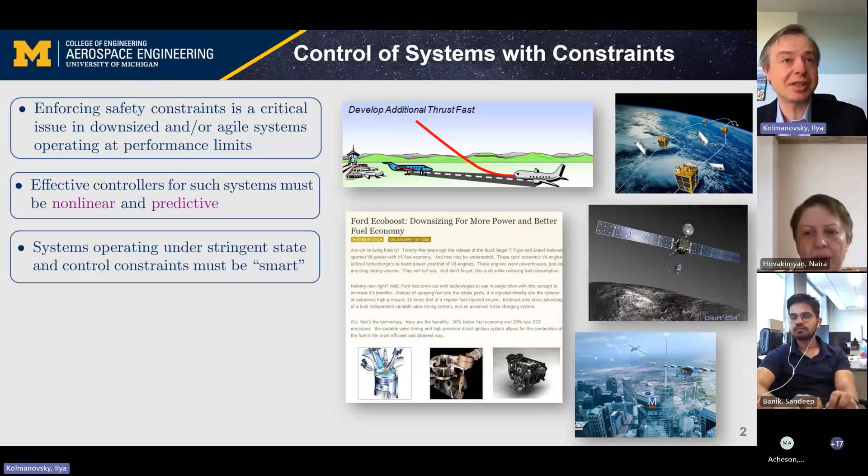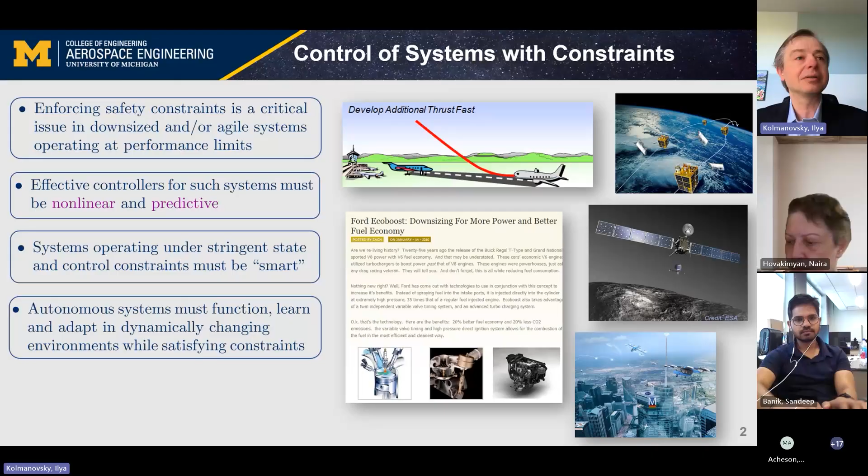The case when you have both state and control constraints, actuator limits, is perhaps the most difficult, because these are situations where systems operating under such constraints must be smart. And if you think about autonomous systems that operate in dynamically changing environments, they must be able to learn and adapt. I will not dwell on this.

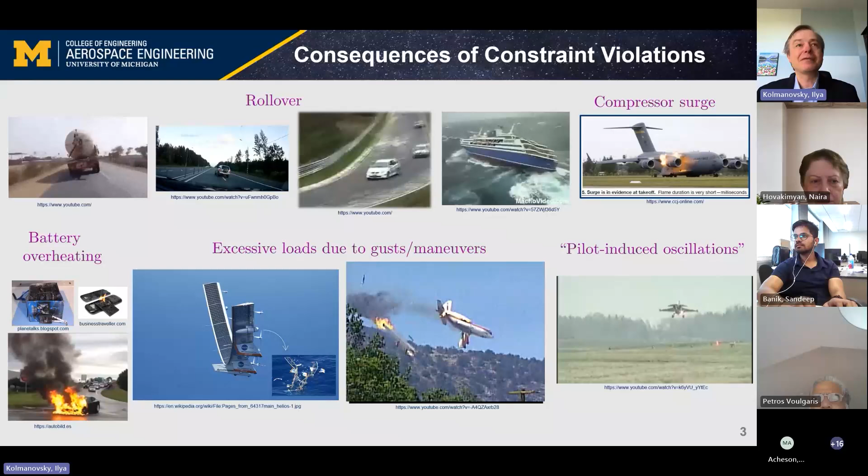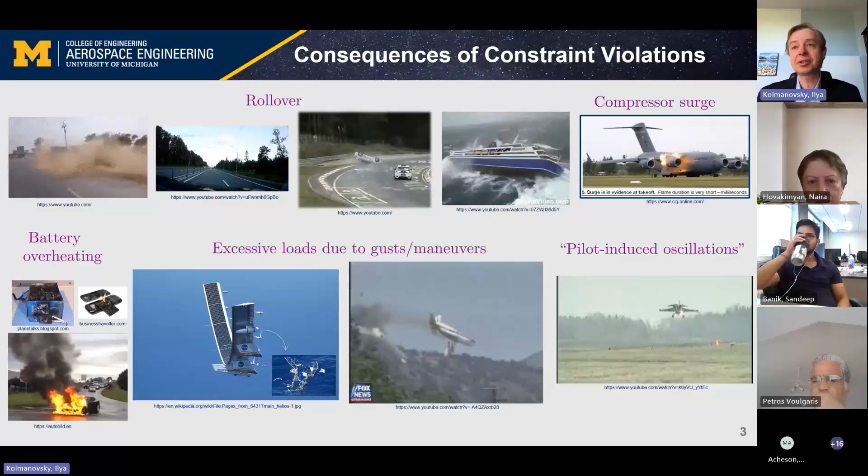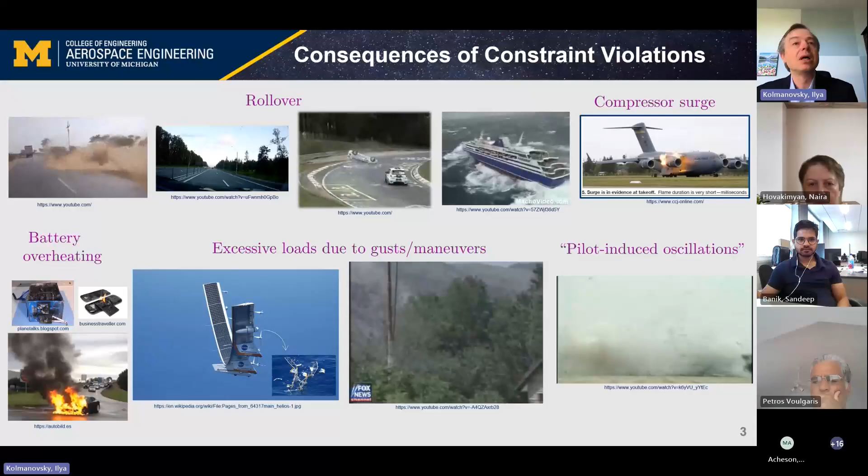These are all familiar examples of what bad things can happen if one violates constraints: various types of rollovers that can occur, compressor surge, battery overheating, violation of loads during maneuvers or during gust encounters, and issues related to pilot-induced oscillations that also typically involve constraints, saturation limits on the actuator. So it's a pretty important problem to be able to deal with constraints and enforce constraints.

Now, one of the key tools and common approaches for dealing with constraints has been model predictive control. And the idea of model predictive control is, first of all, it's a feedback control, defined by the first element of the optimal control sequence obtained as a solution to a constrained discrete time optimal control problem.

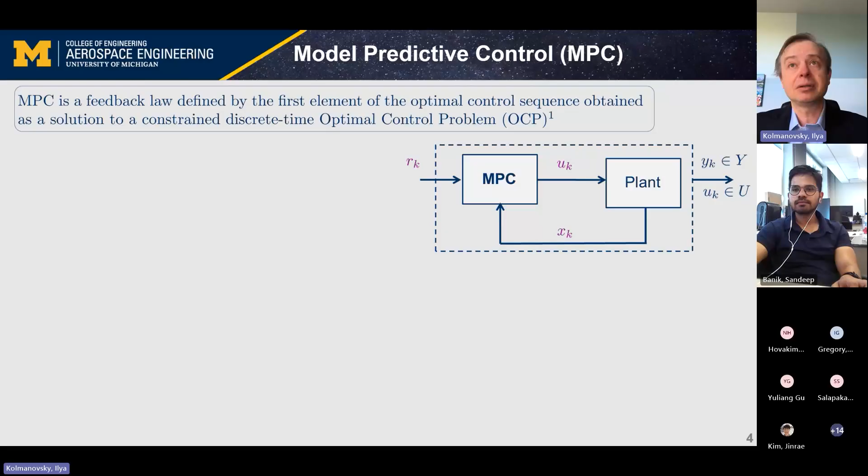And typically you see something like this. So there is a cost function that you'd like to minimize, consisting of a terminal cost and then a running cost. I often use hats to denote predicted state and control values over the prediction horizon of, say, n steps. And then that's what you're trying to minimize, subject to your initial state in prediction being the current state of the system.

Typically, we worry about reference tracking commands, and so we have this R, which is the reference. And then the constraints are enforced by virtue of imposing them in this optimization problem formulation. And so then the first move, or the first element of the optimal control sequence obtained as a solution to this problem, is assigned to a feedback law, and that's precisely what we mean by model predictive control law. So it becomes a function of the state and the reference.

Often one thinks in terms of this type of a diagram, where we have a control sequence that we optimize over the prediction horizon. We predict the response, make sure it satisfies the constraints and minimizes the cost function, and then we repeat this process at the next time instant.

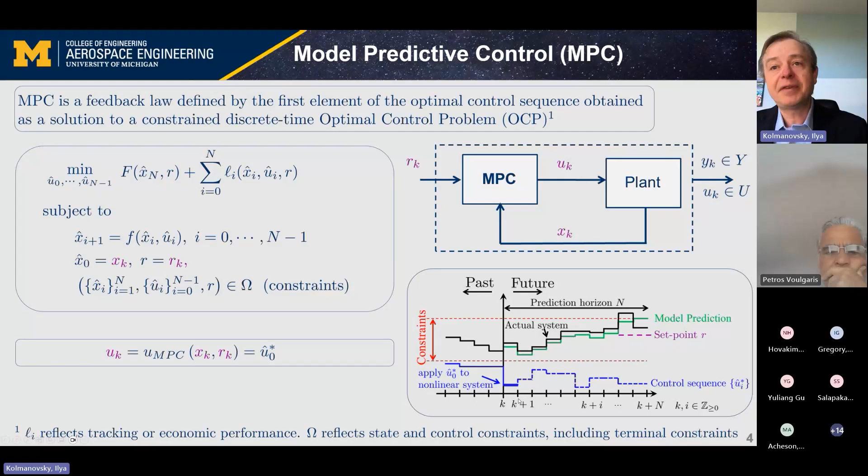Now, MPC has emerged in the late 60s in academia and in the late 70s in industry, fairly independently, I would say. And it has been a vibrant area for academic research for several decades. It's now at a stage where it has a strong theoretical and computational foundation, and its adoption by industry has been growing. Traditionally it has been used in the petrochemical process industry, but there have been notable recent successes in aerospace and automotive industry, and this is not just the sort of laboratory experiments, but that's in production.

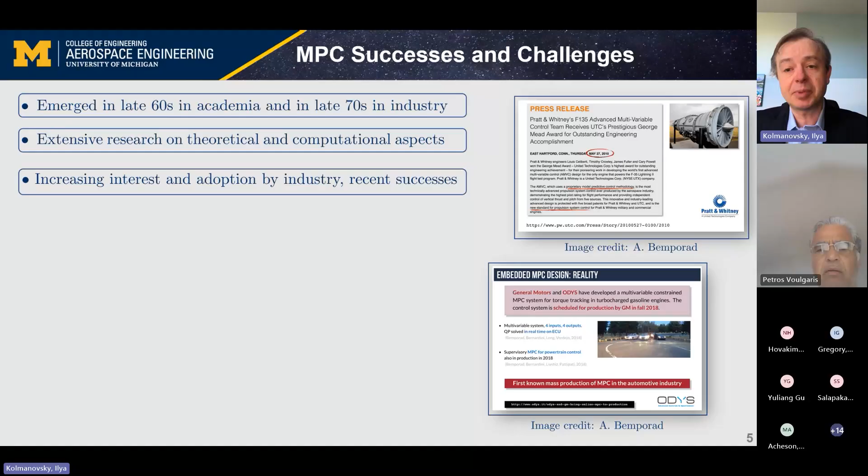Now, what I'd like to do for this talk is focus on a couple of topics relevant to model predictive control, in particular the interplay between computations and closed-loop properties. If you deal with model predictive control computations, it's a significant challenge in some of the fast applications where you don't have as much time to compute. And so traditionally, we've been looking at addressing these problems by speeding up and increasing reliability of computations, basically working on solvers for model predictive control. I'll give basically a snapshot of this work.

More recently, we've looked at these issues of what does it mean to solve the optimization problem in model predictive control inexactly, what does it mean in terms of closed-loop properties and being able to satisfy constraints. I'll tell you a bit about this work.

It turns out that one can develop supervisory schemes, extra schemes that augment model predictive controllers to improve reliability as well as ability to find solutions in limited computation time. This is the idea of reference governors for model predictive control.

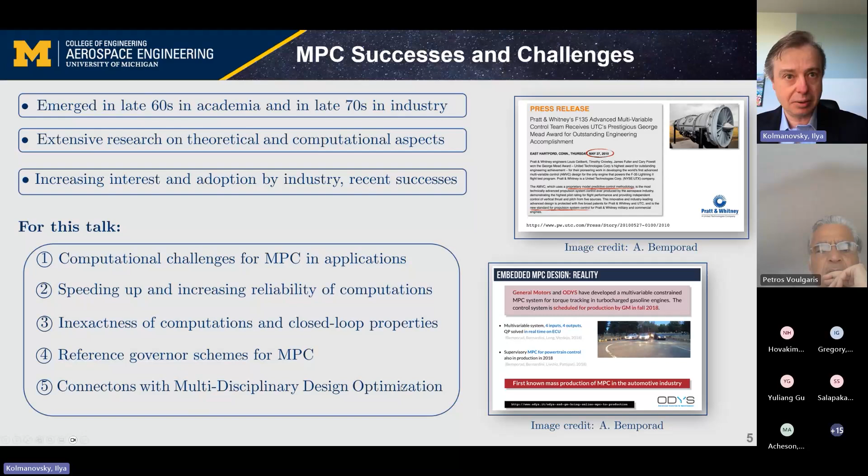I will probably not have time to talk about multidisciplinary design optimization. It turns out there are intriguing and interesting connections between model predictive control and multidisciplinary design optimization. Just as a hint, in both cases you have a bi-level optimization problem or parameter-dependent optimization problem. So you could take some of the ideas I'm going to talk about in model predictive control and apply them to multidisciplinary design optimization. I'll probably not have time to speak about it, but if that's an area of interest, I'll be very happy to talk about it afterwards.

Let me start with a few applications where we've been using model predictive control and where computational power and ability to compute solutions has been an issue.

One is that if you think about small aerial platforms like quadcopters, for example, or some kind of blimps for warehouse servicing, you don't have a lot of computing power. And so implementing MPC in these applications represents a fairly significant challenge.

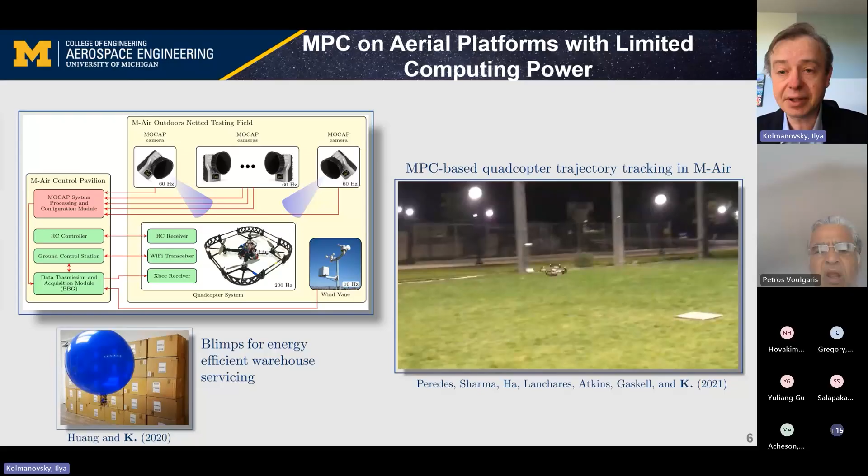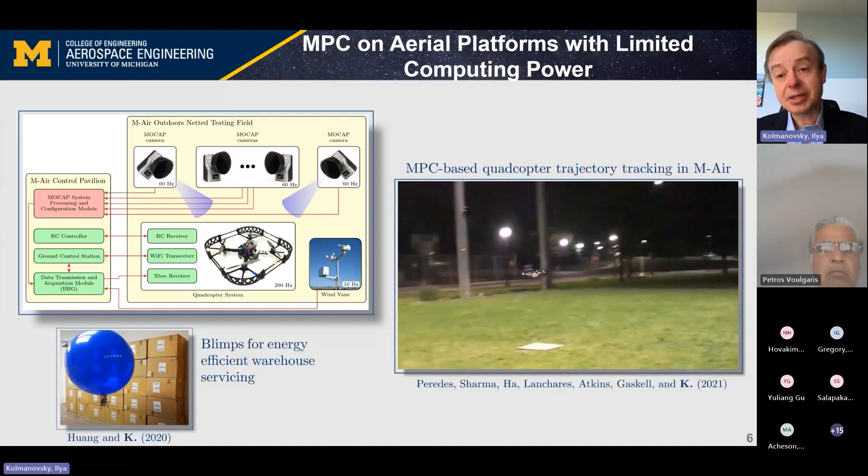This is an example where we are testing an MPC controller for trajectory tracking. This is in our M-Air facility at the University of Michigan. We can test this outdoors, including in bad weather. This is a nice facility that we have. But MPC solutions based on onboard optimization we are able to realistically implement are limited due to, once again, lack of computing power.

Here's an even more significant challenge from both computational and control perspective, and that involves control of aircraft with high aspect ratio flexible wings. Such aircraft are of great interest, of course, as high aspect ratio wings reduce air drag and fuel energy consumption. You can also use them as high altitude, long endurance platforms. Unfortunately, these aircraft are also very flexible, and so they can experience high deflections and loads as they're exposed to maneuvers and wind gust disturbances.

Furthermore, they have fairly complex dynamics, and typical physics-based models for them are high order, hundreds to thousands of states, and it's not straightforward to use them directly for control. There are also numerous structural and control effector constraints which need to be enforced during aircraft maneuvers or when responding to gust disturbances in order to preserve aircraft structural integrity.

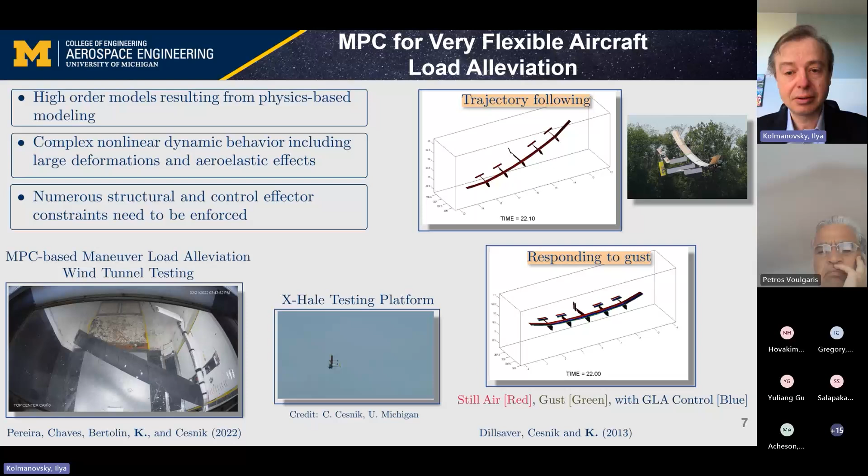Another area for MPC applications we've been looking at is in the area of spacecraft control, and in particular, there is an increasing interest in operating beyond geostationary orbit in Earth-Moon space, the XGEO setting, so to speak. And there are some interesting periodic, quasi-periodic, and chaotic orbits in that setting.

The computation time, depending on the orbit, is not necessarily a major consideration, but reliability of the computations and being able to find solutions is, because to enable low fuel consumption, for example during station keeping, it's beneficial to use special formulations of model predictive control, which use more accurate models with more accurate physics representation, as well as non-standard choices of cost functions, such as sum of norm cost functions. These non-standard, or less standard, problems need to be solved reliably to be able to obtain low fuel consumption in these settings.

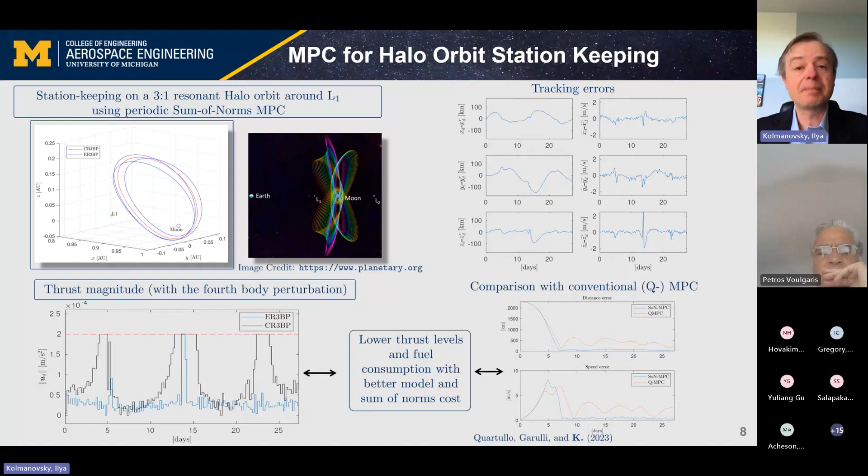Another application for which we successfully exploited MPC involved the reduction in emissions of diesel engines. Diesels are used to power trucks, heavy-duty commercial vehicles, but also ships and even some airplanes. And the controller architecture that emerged was actually quite interesting and involved an air-path controller.

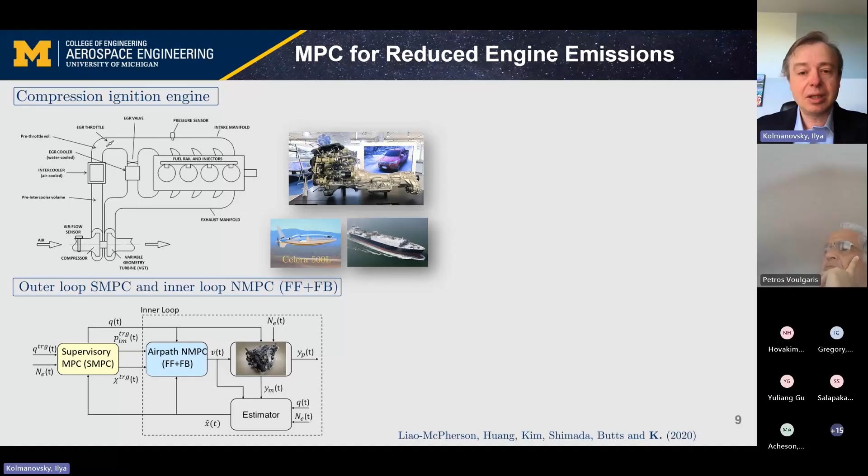So there were feed-forward and feedback MPC controllers. And there was also a supervisory MPC controller that would manipulate the set points to this inner loop air-path controller that would manipulate engine actuators. What's interesting is that while this architecture is quite complex, it has enabled us to improve the transient control of the engine. These are experimental results, and we've done very extensive testing, also comparison with existing baseline controllers.

By better control of the engine, we're able to reduce oxides of nitrogen emissions without increasing beyond acceptable limits the smoke emissions as well as hydrocarbon emissions. And then with the help of some of the methods developed in our research, we have been able to maintain the worst case total computation time for all these three controllers under 1 millisecond in the dSPACE rapid prototyping system that was used for testing in this particular case.

More recently, we have been exploiting neural networks for modeling emissions and developing special methods for the use of MPC based on neural networks for engine applications.

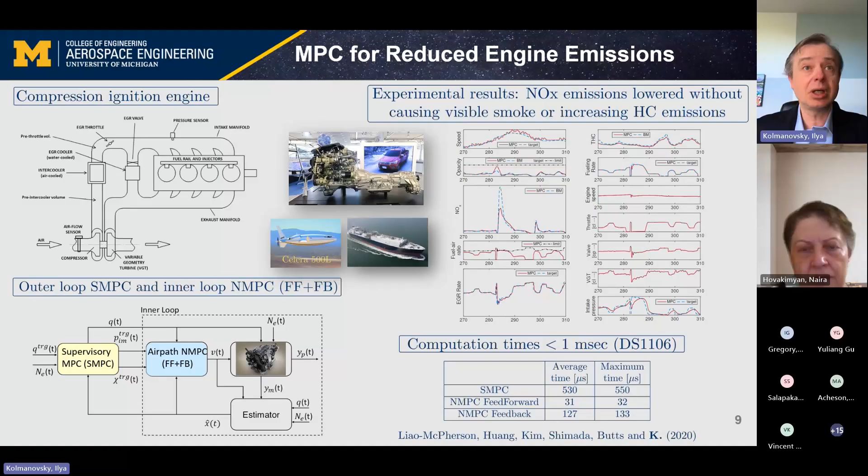As my final application, MPC is increasingly being integrated into settings that involve interactions with human agents. A significant challenge is how to predict the response of human agents and how to non-conservatively operate in such environments. In particular, on a highway, a merging vehicle has to nudge its way through interactions with other vehicles, and if there is dense traffic, that's a non-trivial thing to do if the vehicle is automated.

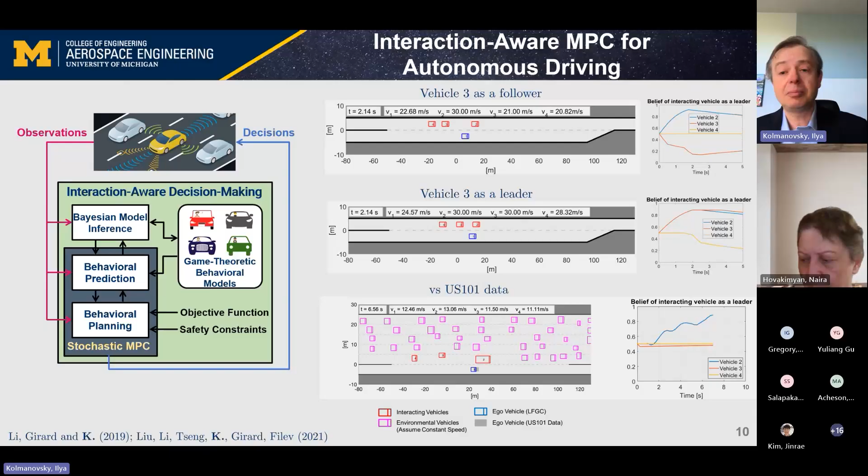In our work, we have been exploiting a game-theoretic multiple model framework to represent human-driven vehicles, and then Bayesian inference to assign the probability of each model to each of the surrounding vehicles, as well as stochastic model predictive control to ensure safety over all high probability interaction scenarios while minimizing average cost. Currently, we are limited to a 4-second prediction horizon due to, once again, large computational effort in handling multiple scenarios in model predictive control.

Motivated by this and other applications, we have been working on various approaches to address the computational challenges in model predictive control, approaching this from several different directions. Traditionally, we have been trying to develop and improve computational solvers and optimizers for online optimization, with several related contributions. This is work with multiple collaborators who are co-authors on joint publications, summarized here. I'll give you a flavor of one of these developments on the Newton-Kantorovich method.

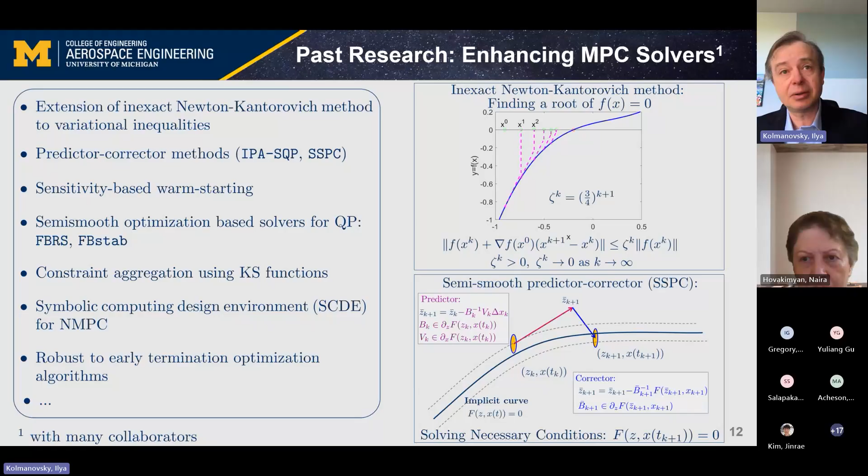We've done quite a bit of work on sensitivity-based methods, predictor-corrector methods to speed up the computations, semi-smooth optimization solvers for QP. We've developed a number of solvers that can be downloaded from GitHub, such as FBRS and FBStab, various constraint aggregation techniques, and approaching problems also from the perspective of symbolic computations and symbolically optimizing the implementation of the solver, which turns out to also reduce computation time, and various other ideas.

I'll speak about just one approach here, which we call the inexact Newton-Kantorovich method for model predictive control. To describe it, I want to go all the way back to the very classical idea of Newton's method for solving a smooth nonlinear equation, f(x) equal to 0.

What you typically do is take a guess for the solution, x0, and then see where the graph of the function is. You linearize this graph to obtain a linear equation, solve it, find the next guess for the solution, x1, and repeat this process. If everything is known exactly, you converge quadratically to the root of the function.

Now, it turns out there is a Newton-Kantorovich version of Newton's method where you don't recompute the slope, so you don't re-linearize your equation, and you just continue to iterate with the slope computed at the initial point, or some other slope satisfying certain conditions. As you can see, you converge slower, but you still converge to the root.

In fact, there is an inexact version of the Newton-Kantorovich method where you don't even have to solve the system of linear equations, or the linearized equation, to completion. You only need to solve it up to a certain tolerance, which should decrease as you approach the root. But with this inexact version, you still converge to that root.

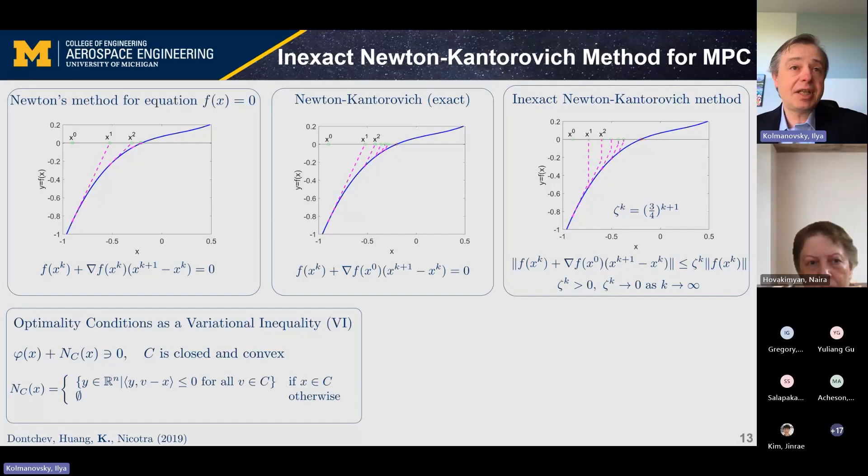Now, when you deal with model predictive control, the setting is a little different because it's a constrained optimization problem, so you deal with Karush-Kuhn-Tucker conditions. They can be restated in the form of variational inequalities—these are just KKT conditions. They are a little more complex objects to work with than smooth nonlinear equations, but it's possible to extend this inexact Newton-Kantorovich method to variational inequalities. We've done it in one of our papers in Transactions on Automatic Control, and it's possible to get guaranteed convergence rates as well as estimates of the region of attraction.

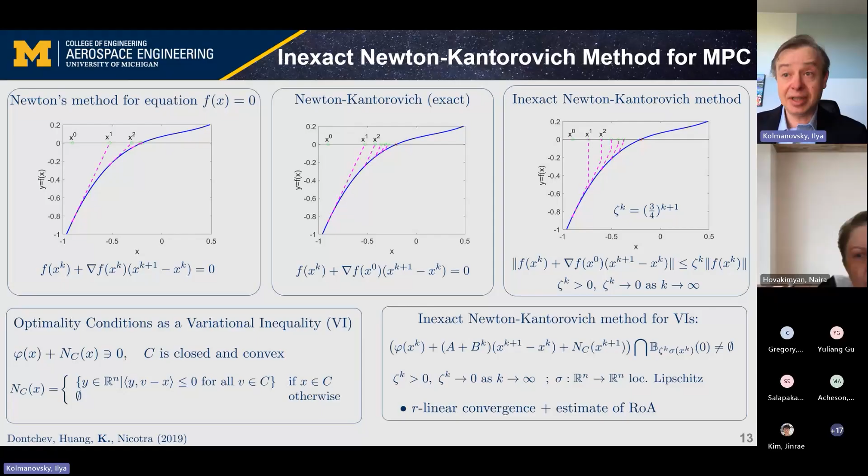You can couple these ideas with a variety of methods for solving MPC problems, for example sequential quadratic programming. You could integrate these ideas in a quite straightforward way to solve the necessary conditions for optimality. And indeed, in examples such as spacecraft attitude control, you can demonstrate reductions in both average runtime as well as maximum runtime per iteration for solving a model predictive control problem by taking advantage of these inexact Newton-Kantorovich ideas.

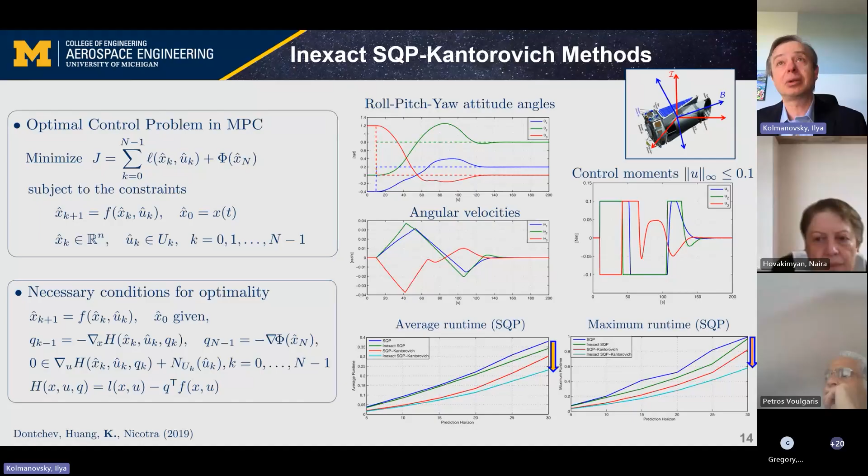Now, this is a brief flavor of the work that we have done in the past, and more recently we started to look at what happens with model predictive control when you rely on inexact optimization. Suppose you cannot solve the problem in MPC exactly. What happens? How is the closed loop performance affected?

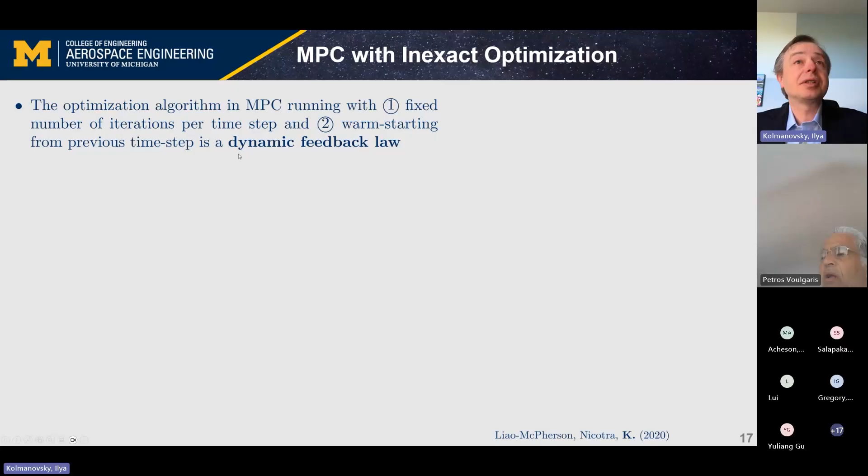The optimization algorithm in model predictive control runs with a fixed number of iterations. We assume there is some kind of iterative solver by which we solve the optimization problem, and we are only able to perform a fixed number of iterations that our processor allows. We also use a warm start from the previous time step. The key realization is that this becomes a dynamic feedback law.

In ideal optimal MPC, here I don't have a reference command, I just have state and control. If you think about ideal or optimal MPC, you take a state, solve the optimization problem, and that produces the control signal U. So this is a static feedback in such a setting.

Now, if you do suboptimal MPC, solving this problem inexactly, relying on a fixed number of solve iterations per time step and warm starting, then the picture changes and your controller becomes dynamic. Your optimizer acts as a dynamic controller. It has an internal state, Z sub k, which is just a guess for the solution that you improve by running L iterations of the solver per time step.

So the optimizer starts running in parallel to the plant, and then the question is what happens to the properties of this closed loop system.

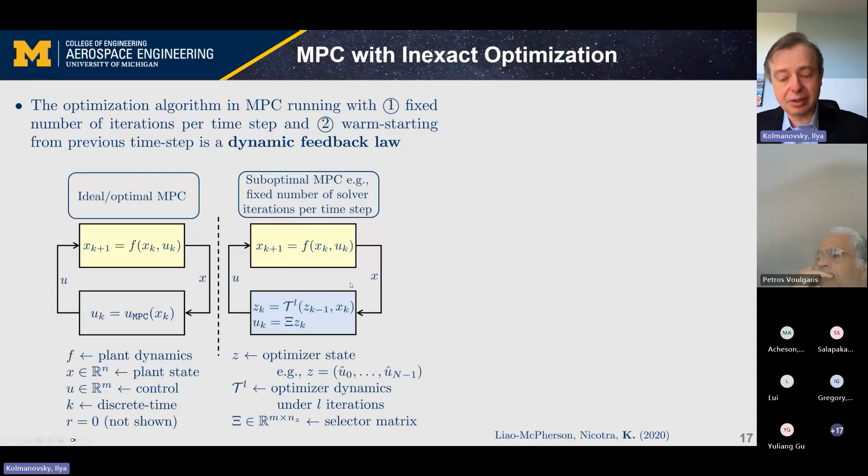And of course, this type of consideration becomes practically important when you have to, for example, land a SpaceX rocket, which has somewhat similar dynamics in this type of situation.

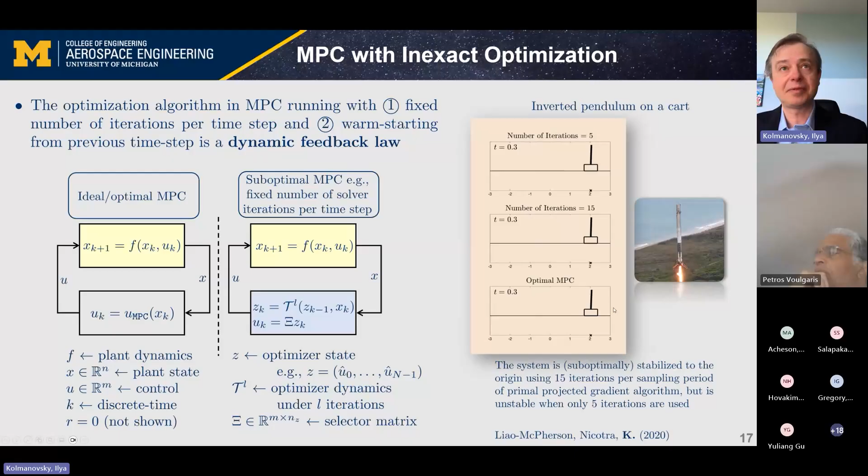So we've been looking at bringing various tools from control theory into analyzing this picture, and obtaining conditions on how many iterations we may need to obtain, for example, closed loop stability, or the ability to satisfy the constraints.

One of the useful tools is the small gain theorem. The key idea here is to think about this closed loop system, where we rely on inexactly solved MPC problem, as an interconnection of two systems. One is the ideal closed loop, which is based on ideal optimal MPC, and then the optimization error subsystem, which creates essentially an input disturbance.

So the ideal control action is being modified by this computational error. And then this optimization error subsystem - the disturbance input to it is a change of the state in the plant, because if the plant state doesn't change, we're solving the same optimization problem. So this delta X is the input.

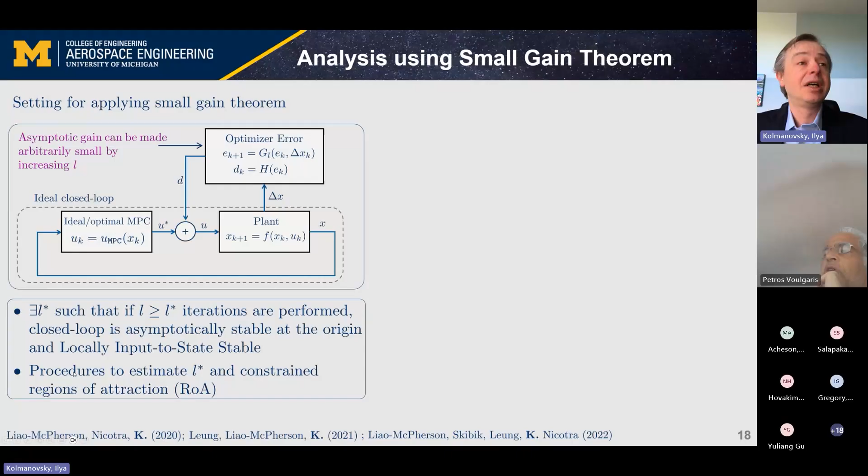The key realization is that for a variety of optimization algorithms, if you think about the input-output gain from this input to this output, that gain can be made arbitrarily small by increasing the number of iterations. So what this means is that you can show there exists a number of iterations, L star, such that if you perform more iterations than this L star, then the closed loop system is going to be asymptotically stable at the origin, and in fact it's going to be locally input-to-state stable.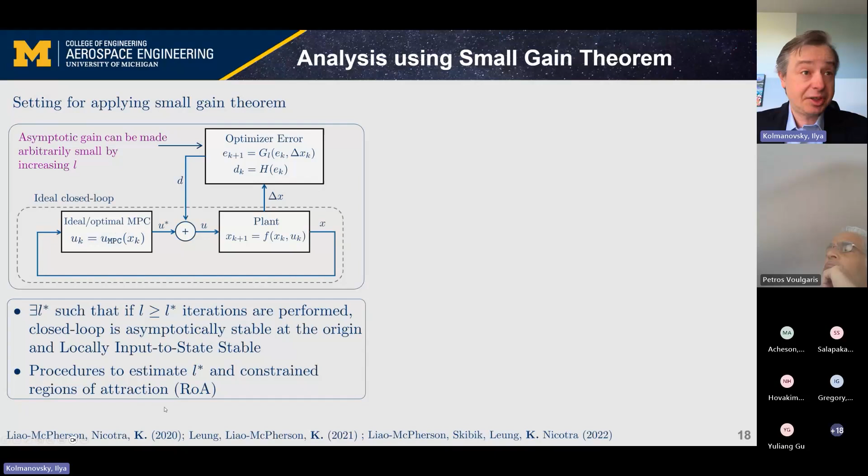This line of reasoning also yields procedures to estimate L star for certain problems, in particular for the case of linear systems and quadratic cost, as well as constrained region of attraction. We have actually been exploiting this type of estimate in practical problems, for example stabilization of drifting vehicle dynamics - an open loop unstable equilibrium that you might use, for example, during car racing. The current analytical estimates tend to be conservative.

Empirical estimates, if you just run closed loop simulations, they tend to require fewer iterations. But the fact that you have analytical estimates for the number of iterations is interesting. First of all, it is an analytical guarantee.

But secondly, you could study how you should reformulate your problem in such a way as to reduce this L star. For instance, you could almost guess that if you increase the prediction horizon of the MPC problem, that would typically result in an increase of L star, and that is indeed the case. But let's say you are in a situation where L star is unacceptably large. How can you reformulate your problem to decrease L star?

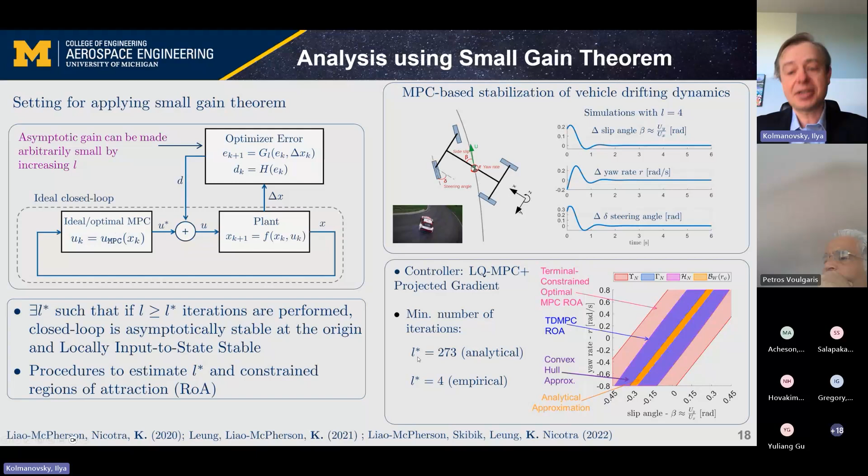Well, if you don't want to change the horizon, one other thing that you can do is increase the control weighting. So if you think about the typical linear quadratic cost in your optimal control problem, you can increase the R matrix, or entries in the R matrix, and making control more expensive decreases L star. So you can address this type of situation.

Now, let me briefly talk about another idea which can enable operation with a very small number of iterations per time step, even if the MPC optimization problem is solved to completion. We refer to this idea as the computational governor.

Recall again that in model predictive control, the discrete time optimal control problem is solved numerically using a numerical optimizer, and this is typically done with warm starting from a previous time instant. Now, if the system is close to steady state, at a set point, the warm-started MPC solution is not so different from the optimal solution, and typically one iteration per time step is sufficient for convergence.

The spike in the number of iterations that the optimizer needs to perform occurs when there is a large change in the MPC problem data. For example, there is a step-like change in a reference command - R here is a reference command to which the output responds. If you look at the number of iterations you need to perform, that's typically where you see the spike, when the problem data changes very abruptly.

So then the idea is pretty clear. What one can do is replace the step change by perhaps a smaller step and a ramp. And if you do it carefully, you could compute the solution reliably with perhaps just one iteration of the solver per time step.

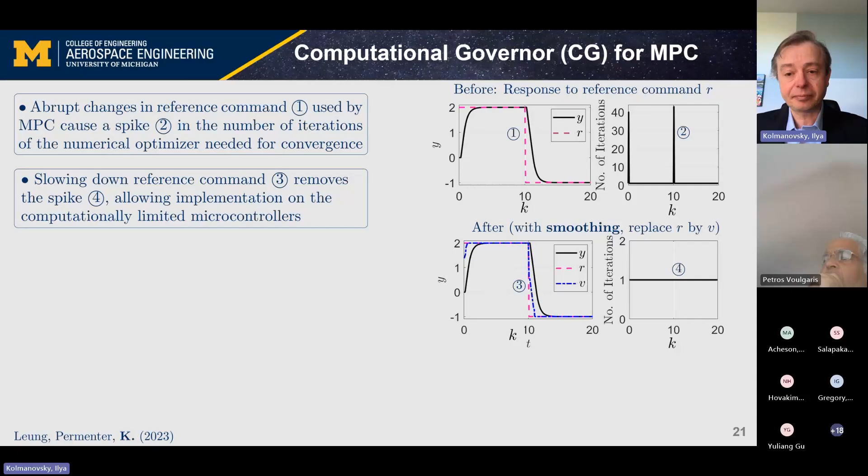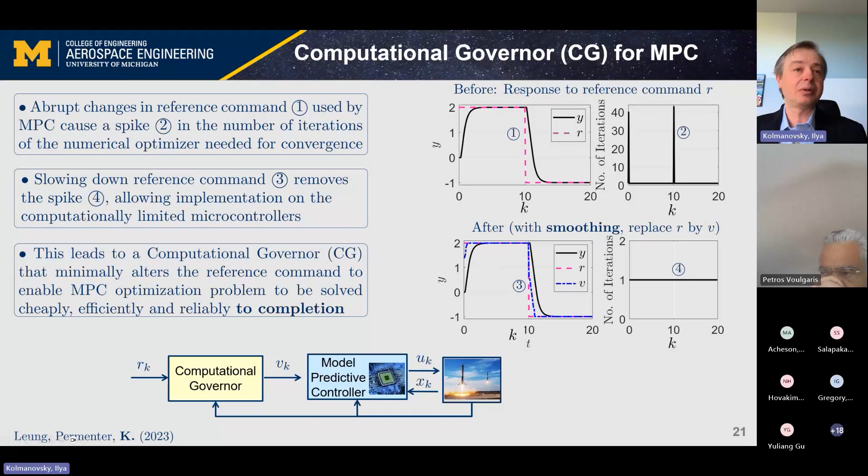Of course, the question is how to construct such a computational governor that would replace the original command R by an altered command, which we're going to denote by V, without leading to too much performance degradation. From the analysis perspective, the problem is not straightforward because multiple variables are changing simultaneously: the state of the system, the solution evolved by the model predictive controller, as well as this V.

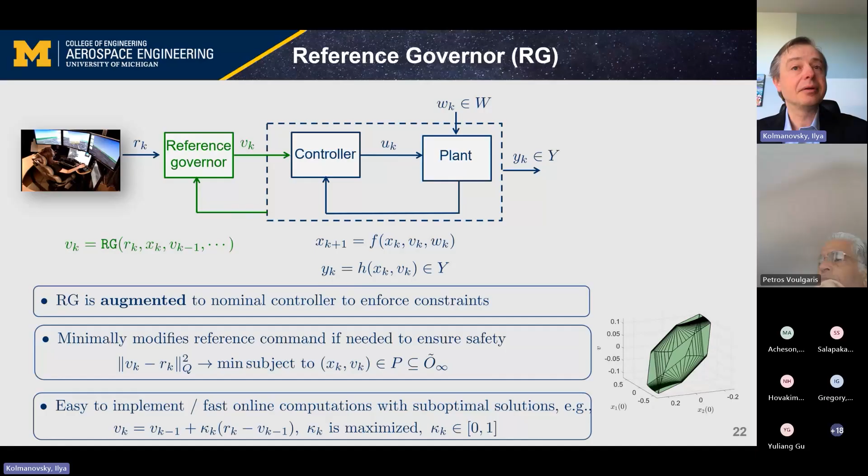Now, before I talk about the computational governor, let me first mention that it is a variant of the so-called reference governor. The reference governor is a safety supervisor for reference commands sent to the system. Traditionally, reference governors have been developed for enforcing physical constraints in the system, for example limits that physically exist. So the computational governor is a variant of the reference governor applied to computational constraints, or cyber constraints, if you like.

The idea of the reference governor is that it's a scheme augmented to the nominal controller. It monitors reference commands that may be issued by an operator or a higher level in an autonomous control system, for example a higher level controller. If these commands are determined to be unsafe, it's going to modify them, and it's going to try to keep this modification to a minimum. Typically, you solve some kind of optimization problem where the output of the reference governor is as close to the input as possible, subject to a safety condition on the modified state and command pair.

It turns out that such schemes can be built that are fairly easy to implement, as well as having the property of fast online computation with especially suboptimal solutions. For example, this is something we call a scalar reference governor, where the output is just a linear interpolation of the previous output and the current reference command. This is a cartoon, but perhaps it's a conceptual way of thinking about reference governors.

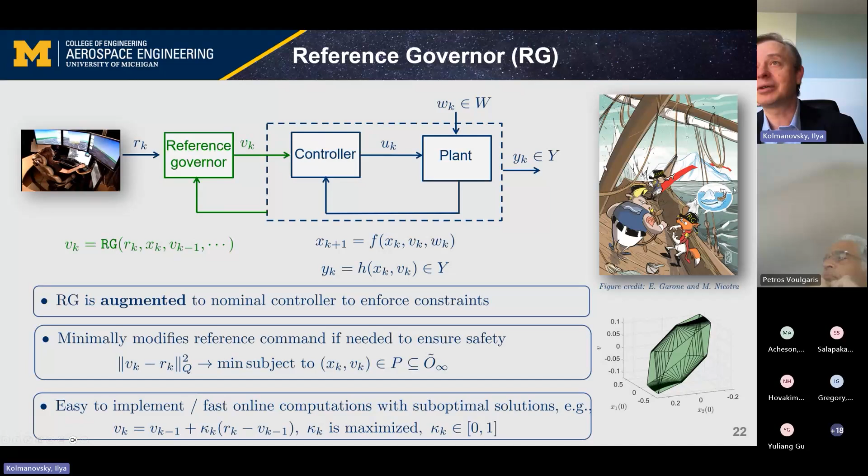So here we have a user that issues a command. The command is not safe. There is a nominal controller with a PID, depicted here. And then the reference governor modifies this command to sort of go around the iceberg and avoid violation of constraints.

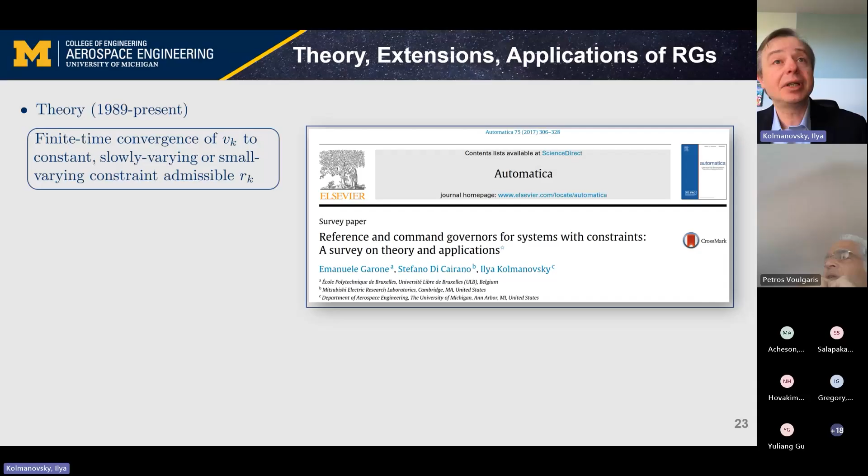If you'd like to read a bit more about reference governors, there's a survey paper in Automatica that we published a few years ago, and there have been multiple extensions of the schemes, as well as applications in many domains. In my group, we worked quite a bit on applications of reference governors to engine control, propulsion systems, and including experiments in vehicles.

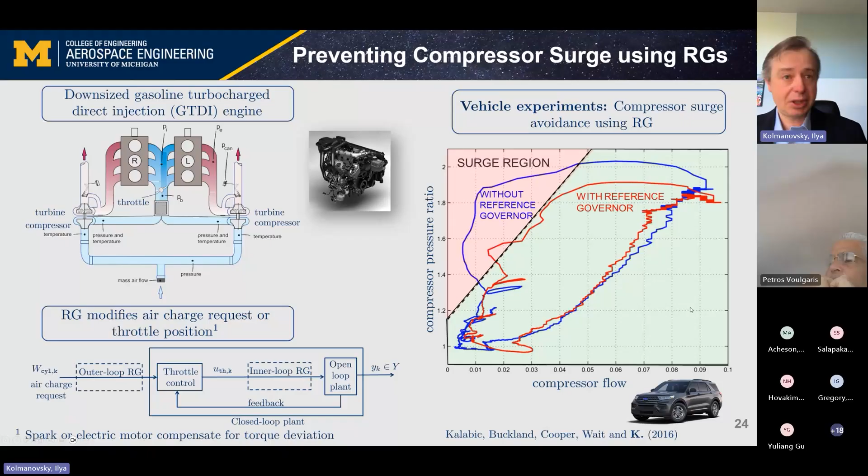Finally, as an aside on the reference governors—I'll come back to computational governors—I wanted to mention our recent work with Naira as well as with Pan Zhao on integrating reference governors and L1 adaptive control. This is a recent paper in Transactions on Automatic Control that we had. The idea is that L1 adaptive control would match the uncertain closed loop dynamics to a nominal model. The approach is nice because both state and control constraints are considered and enforced.

Many approaches for handling constraints under uncertainty exist in the case of just state constraints, assuming you have basically any control authority you like. The problem is much tougher when, in addition, you have control constraints, and this is the case handled in the paper. One of the things we've shown is that there's reduced conservatism by taking advantage of adaptation versus a robust reference governor that tries to protect against worst case uncertainty without making any attempt to estimate and compensate for it.

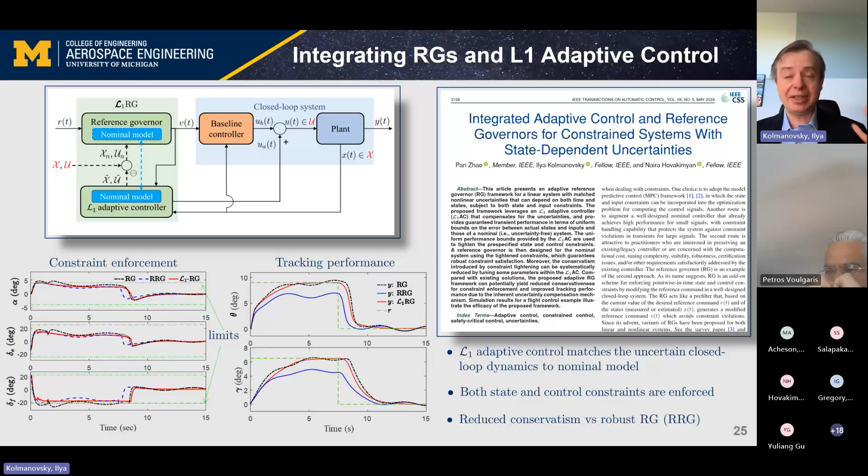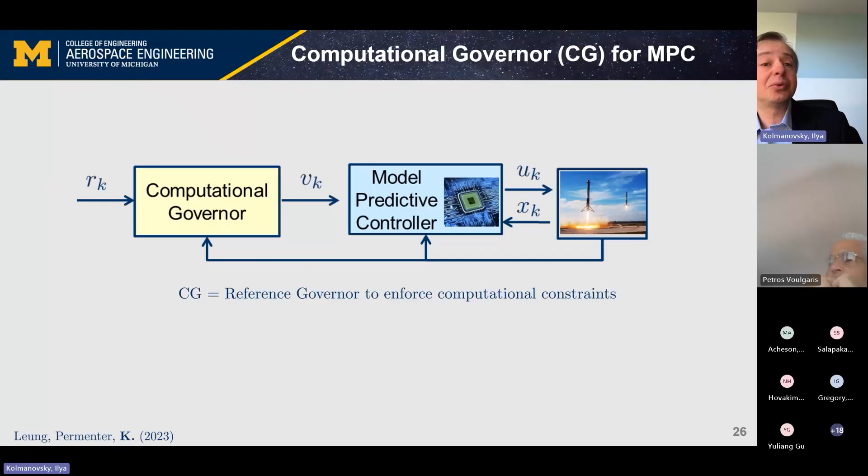Okay, with that aside, I want to come back to computational governor, which is a variant of reference governor scheme, but it's used to enforce computational constraints. So how do we construct that? Here I'm going to give a few more technical details, perhaps. I'll sketch them so that if you're interested in details, you see what it involves.

First, we are looking at linear quadratic MPC problems, so our cost is quadratic and the model is linear. It's well known that in such cases we have a quadratic programming problem. If we condense, our optimization variable is a control sequence, so we stack control moves on top of each other. With respect to this control sequence, we end up with a problem which is a quadratic programming problem, minimizing a quadratic function subject to linear constraints.

It's a parameter-dependent problem because it depends on the current state as well as this modified reference command that we have. So how do you solve a QP? Well, you apply Karush-Kuhn-Tucker conditions—this is pretty much stationarity conditions, primal dual feasibility, and complementary slackness—where here we introduce this homotopy parameter eta instead of equating this to zero. This is a typical approach in interior point methods.

So then what we do—lambda here are the Lagrange multipliers, as slack variables, they have to be non-negative—we employ a logarithmic transformation. The Lagrange multipliers are parameterized in terms of this new variable gamma, and note that this is always non-negative, S is always non-negative. If you take lambda times S, you get precisely eta. So this complementary slackness condition is satisfied thanks to this logarithmic transformation.

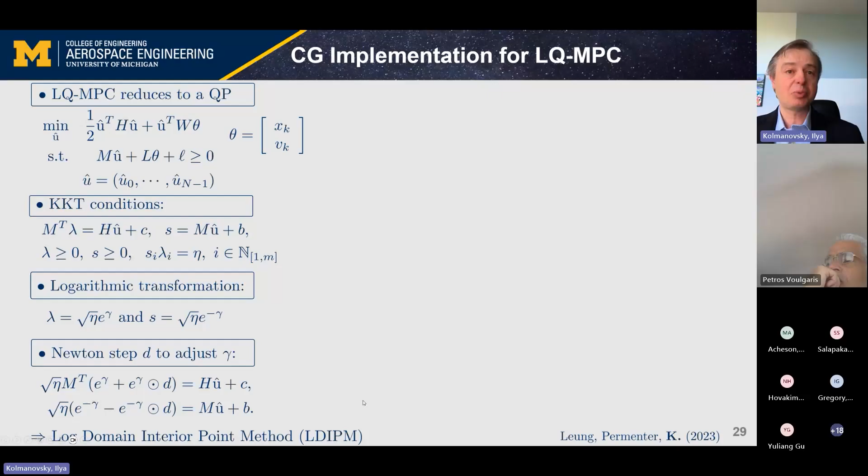Now, what I just described here is something called logarithmic domain interior point method, which is a nice way of solving QP problems, and that's what we apply our computational governor to. So the structure of the computational governor is similar to the scalar reference governor. The V sub k, the modified reference, is the previous reference plus kappa, and kappa is between 0 and 1, and this multiplies the difference between the true reference command and the previous reference command. So pretty much it's a linear interpolation function where kappa is an adjustable variable.

To determine by how much to adjust your command, you have to solve a linear program, simultaneously for two variables: kappa, and the homotopy parameter eta that I've introduced. It turns out that the key constraint in this problem is that D, the Newton step, has to be less than 1 in infinity norm. This is the key condition, and I'll explain what this constraint involves. Other conditions are that kappa has to be between 0 and 1, and eta, the homotopy parameter, we typically pick some kind of range.

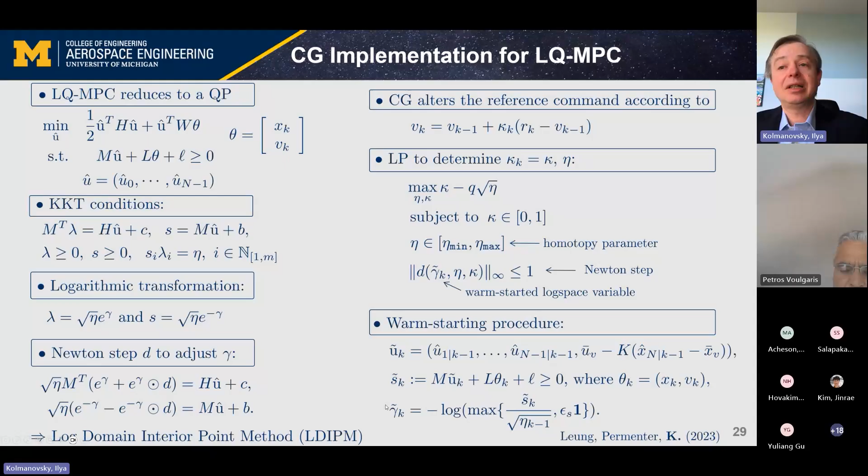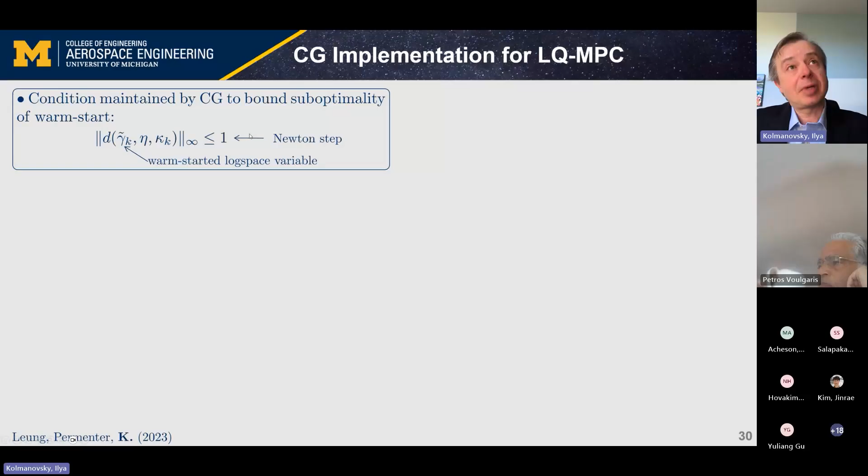Ideally, the homotopy parameter has to be reduced to 0. Now, what is gamma tilde? Gamma tilde is a warm started value of the log space variable, and we use a procedure grounded in classical MPC, shift by 1 and pad by 0, to figure out this initialization. So the condition maintained by the computational governor, which keeps our solver happy, is that D, which we can explicitly compute, this Newton step, has to be in infinity norm less than or equal to 1 when evaluated at the warm started log space variable. This is the condition that effectively tries to bound the suboptimality of the warm start. So we are trying to make sure that when we warm start our solver, our warm start is not too suboptimal.

Sorry, is there a question online? No, I think Louis is just not muted. Louis, please mute yourself. Oh, okay, so there is no question.

So I can continue. So why is this condition? This is the constraint that we derived in the analysis of this problem. It turns out that if you satisfy this constraint, all the iterates of these LDIPM algorithms tend to be in a guaranteed fast convergence region, meaning we only need very few iterations to converge to the solution. They are also guaranteed, if this condition holds, all iterations are guaranteed to be primal-dual feasible. That's a nice feature because feasibility is maintained with respect to state and terminal constraints, even for short horizon MPC. This actually enables the use of short horizon MPC, where state and control constraints would be strictly enforced.

Now, we have a paper that also does more analysis of the closed loop properties with such a computational governor device, and we can guarantee standard reference governor properties. That is, the modified reference command converges to the true reference command in finite time. This happens for constant and strictly steady-state admissible references, and of course the states converge asymptotically.

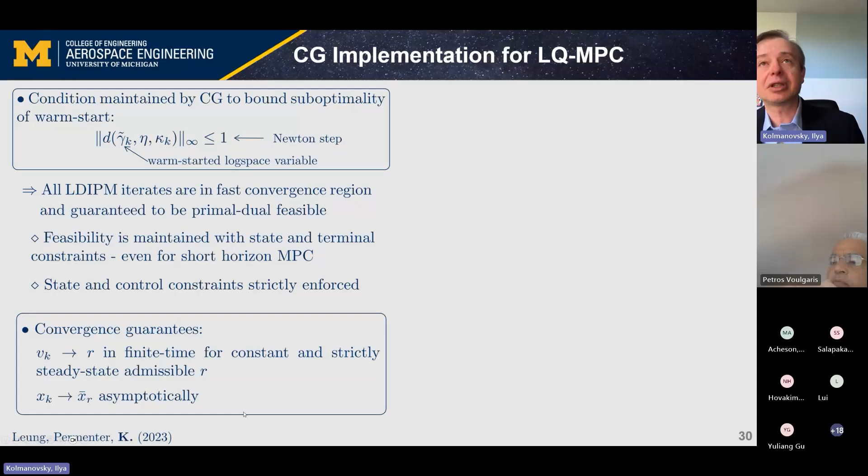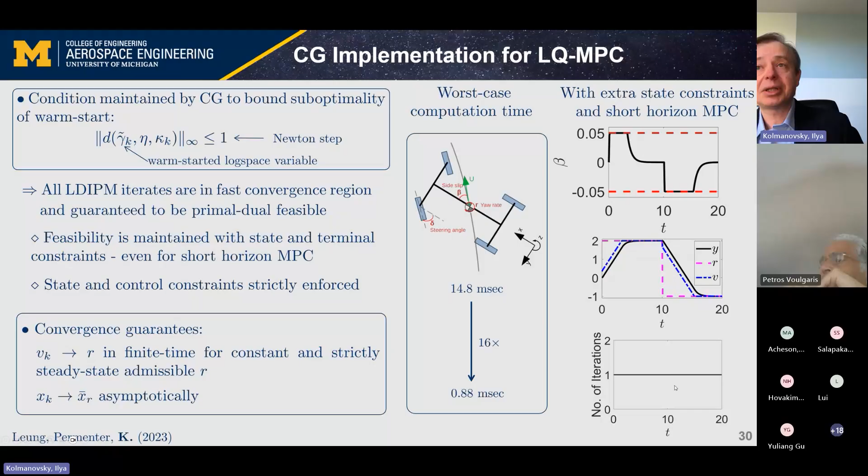In practical applications, we see at least an order of magnitude reduction in the computational time that we need. For example, this is for a vehicle lateral dynamics problem. This also gives us a nice ability to use model predictive control with short horizon while being able to strictly enforce state and control constraints. Here's an example where you're enforcing extra constraints of a short horizon solution, and the number of iterations of the solver is equal to 1.

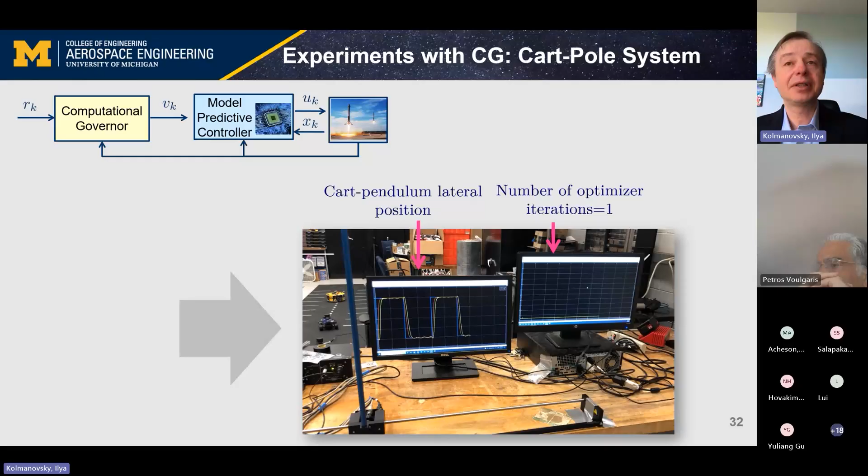I'll skip that slide. Some experiments, first in a laboratory environment: here we are balancing an inverted pendulum on a cart. You could see here, we are commanding different positions to our cart, and the computational governor modifies the step change in the position. We only need one iteration of the LDIPM solver to control this system, so it's a fairly low computational effort achieved through this command filtering action.

And these solutions have actually made a practical impact. There was an implementation done by Toyota, resulting from our joint project on these topics with them. The solution they implemented is strongly motivated by what I have presented, but somewhat different in details. Nevertheless, this computational governor is now in production.

We have been continuing the work on computational governors. The solution I presented is specific to a particular solver, LDIPM. The question is whether you could develop such solutions for other solvers used in model predictive control. Initially we thought we could generate a large sequence of papers just modifying this idea for different solvers, but it turns out the details are more involved, and we've tried to develop such a solution for the alternating direction method of multipliers.

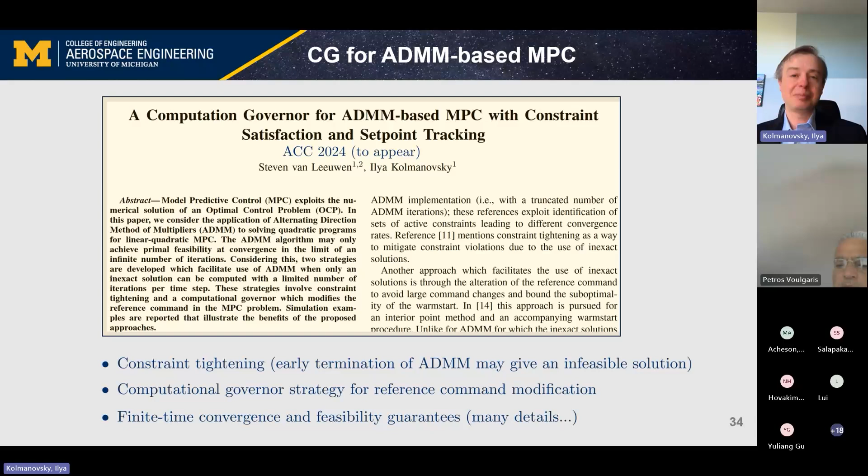It's a popular first-order method, and we will have a paper at the upcoming American Control Conference that reports the details. The motivation is the same and the intuition is the same, but the details are quite different. One difference is that early termination of ADMM may give an infeasible solution, so if you rely on inexact solutions, you also have to tighten the constraints. That changes quite a bit the computational governor strategy for reference command modification. But it looks like we've been able to develop it, showing finite time convergence and feasibility guarantees with respect to original constraints, though again with quite a few details. So it seems that if you pick a different optimization algorithm, the way you couple the computational governor to it may be different, similar in spirit, but quite different in details.

How much time do I have left in the talk? You have still maybe 5-10 minutes to talk. I'm sure there will be questions. Okay.

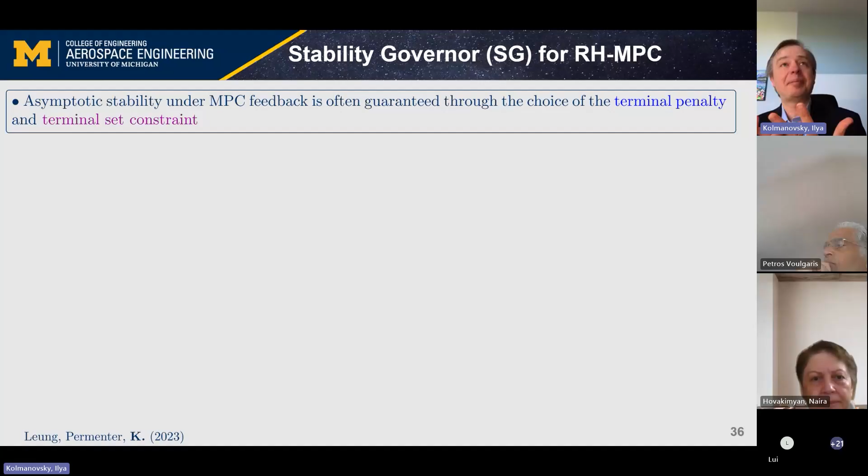Let me continue a little bit on this line of the talk about the computational governor. This work made us realize you could develop a number of supervisory schemes to augment MPC controllers to enable beneficial properties, for example reducing computational time, increasing reliability of the solution, and so forth. One other scheme we recently constructed is something we call the stability governor for receding horizon MPC.

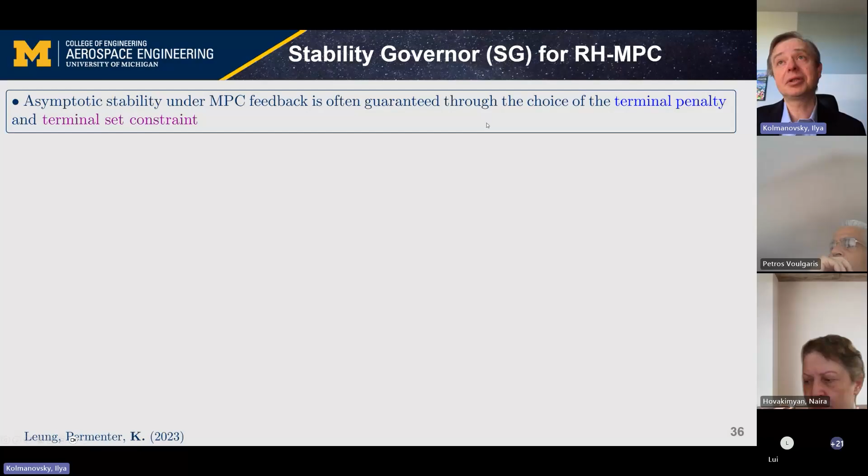The challenge this addresses is a practical one. If you think about assuring asymptotic closed-loop stability under MPC feedback, this is typically guaranteed through the choice of the terminal penalty and terminal set constraints. In the problem formulation you solve in model predictive control, at the end of the horizon your terminal state has to belong to a terminal set, a safe invariant set with certain decay properties for your terminal penalty function.

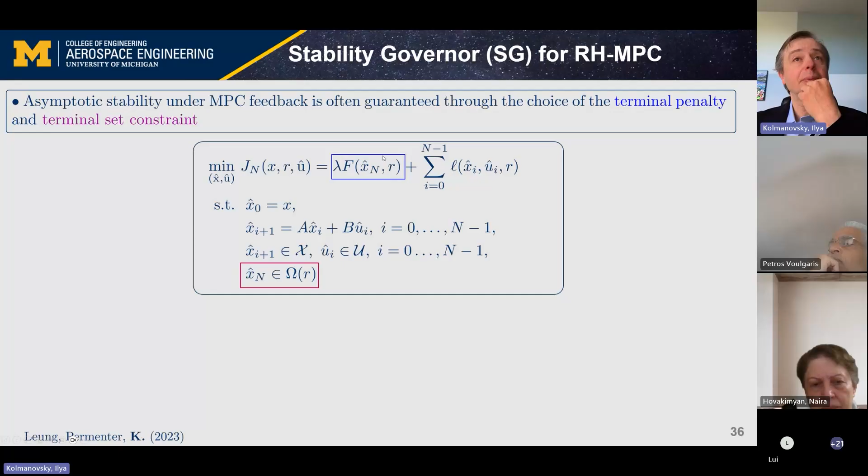You also use the terminal penalty as part of the formulation of your MPC cost. That's one of the classical approaches to ensure closed loop stability in model predictive control.

Now, in practice, often you try to avoid imposing these terminal constraints, and there are various reasons for this. One is that the terminal constraint complicates online optimization. For example, this constraint may be ellipsoidal or quadratic, even if your problem is for a linear system with quadratic cost—so it's quite a different constraint.

It can be difficult to compute offline for practical systems. But more importantly, its use can degrade closed loop performance because a lot of the effort of the controller goes into satisfying this terminal constraint rather than minimizing the cost function you truly care about. So in practice, practitioners often avoid adding this constraint, but then the associated closed loop stability guarantees are lost, and properties are lost too because of the reduction of the region of attraction when you remove this terminal constraint.

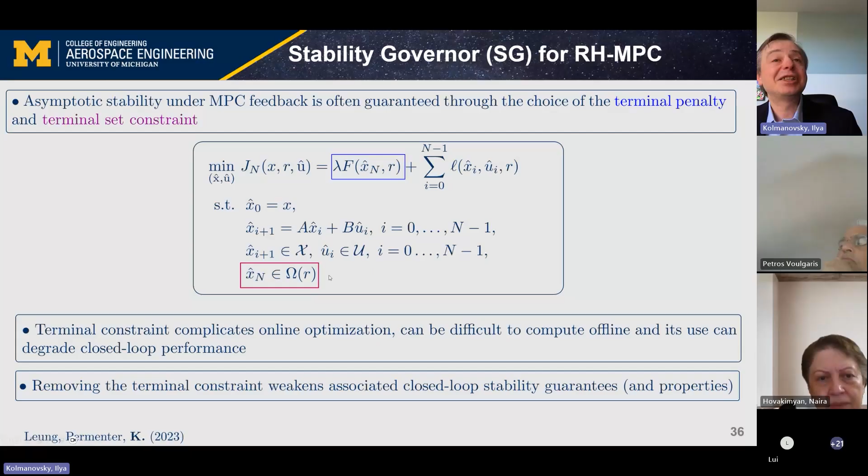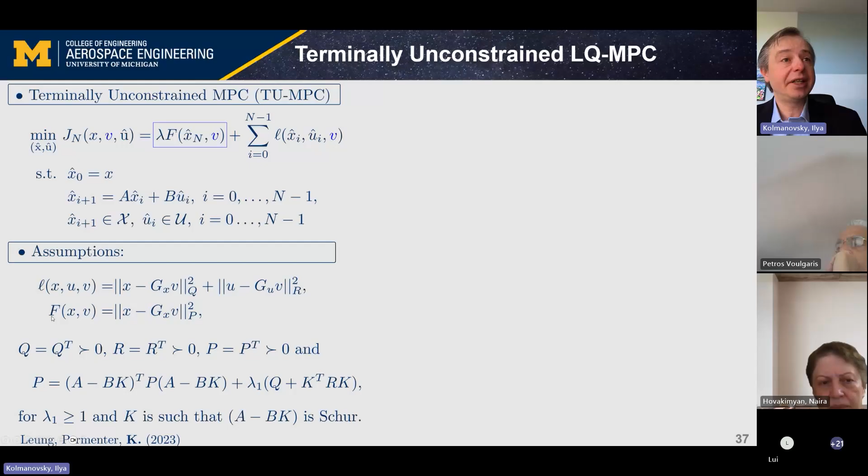So we wanted to address this with a supervisory unit which we call the stability governor. I'll show a few details here. We are going to drop this terminal constraint and look at a terminally unconstrained MPC problem, where we take our reference command R and replace it with V, the output of this stability governor. We'll look at a linear quadratic MPC case—a standard linear quadratic cost with a quadratic terminal penalty function.

It turns out, in the interest of time I'll skip some details, that even if you drop this terminal constraint, there is still a guaranteed region of attraction for this terminally unconstrained MPC. This is a sub-level set of the optimal cost-to-go, Vn alpha. The size of that sub-level set depends on a couple of parameters: one is the horizon n—the longer the horizon, the larger the region of attraction—but it also depends on the terminal penalty lambda, as well as the size of the so-called implicit terminal set, a safe sub-level set of the terminal penalty function. Bottom line: there is some region of attraction that you can prove exists for this terminally unconstrained case.

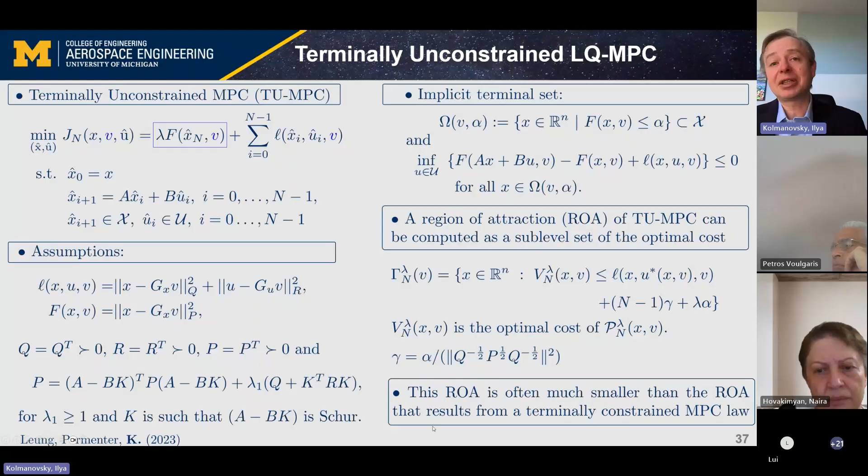The trouble is that the region of attraction is typically much smaller than what results from a terminally constrained MPC law. So what we do is add this stability governor as a way of enlarging the region of attraction, and the logic for modifying the reference command is exactly the same as before.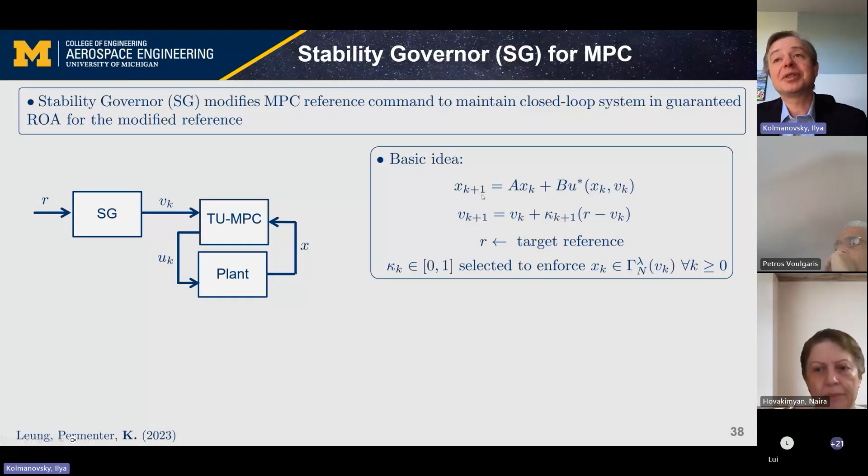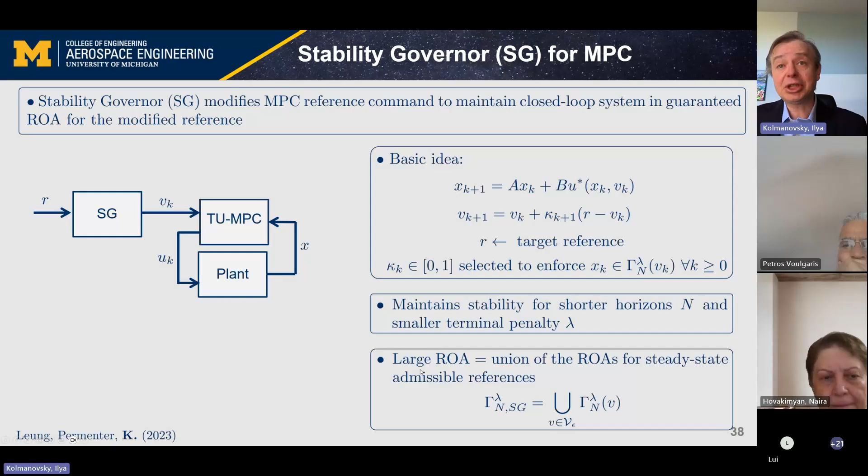The procedure to pick this kappa parameter is a bit different, but the key idea is that we always maintain the state of our system in the guaranteed region of attraction for the modified reference. As a result, with this trick, we're able to maintain stability for shorter horizons and smaller terminal penalty. The whole intuitive idea is that the region of attraction we get by modifying this reference is the union of all the regions of attraction corresponding to individual values of the reference command, so we get a much larger region of attraction.

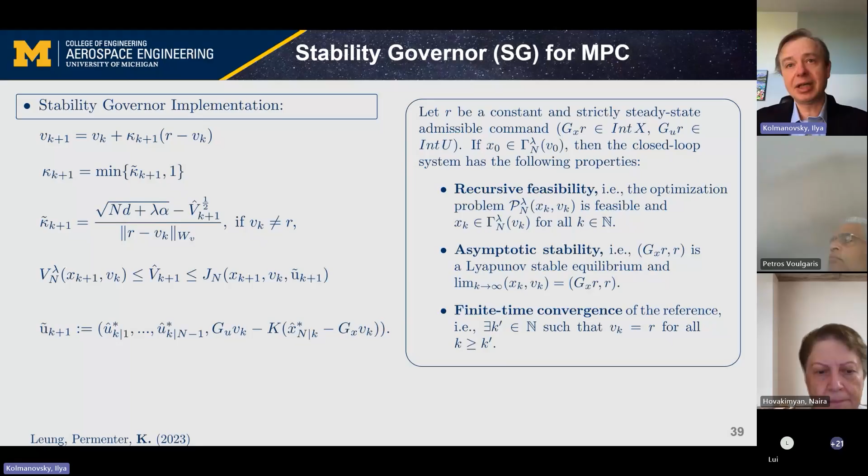I'm going to skip the details, but just mention that the procedure for selecting this kappa is explicit - you could compute this in a very simple way. We had a paper, I believe in Automatica, where we show recursive feasibility, asymptotic stability, and finite time convergence properties. So there are analytical guarantees for such a scheme.

Let me briefly show results from one of the simulations, which also bring an important point across. Here I have an ungoverned case, horizon of 85 steps, for the inverted pendulum on a cart. I'm giving a command shown by this red dot, and this is a very large change in the command. My initial state is outside of the region of attraction of this red dot, so my closed loop is unstable.

Now, if I use the same horizon but apply my stability governor, you could see that the red dot is not commanded to the system immediately, but is slowly - as fast as possible subject to the conditions I described - driven towards the blue dot. Now the state always stays in the region of attraction, so we're able to maintain stability here.

As well as, of course, to satisfy constraints. In fact, I could reduce the horizon of my MPC problem, which has the benefit of decreasing computational cost. The price to pay is that my motion is less agile, more slow, but I'm still maintaining stability and still reaching my point while satisfying constraints.

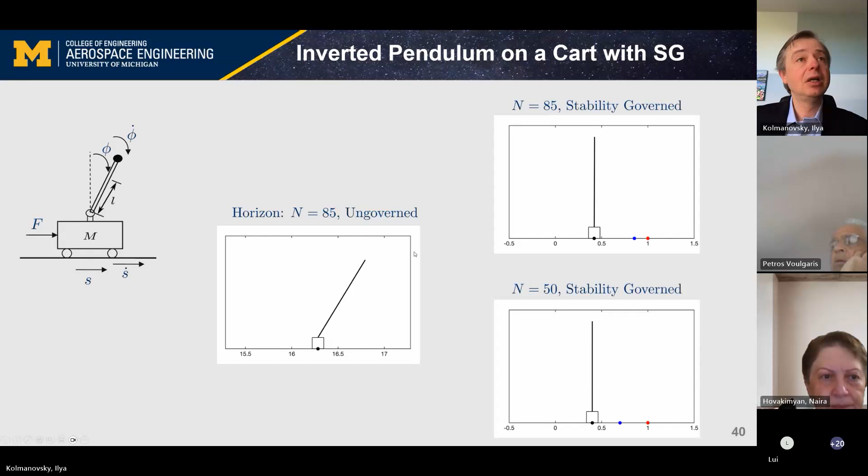There's a variety of other things you can do. We looked at problems involving model predictive control that accounts for preview information - for example, in some problems you might have preview of loads, perhaps road terrain and vehicles, gust profile, perhaps with a LiDAR in certain applications. It turns out you can develop a feasibility governor to help maintain feasibility for MPC with disturbance preview. The details are in a paper we recently had in Systems and Control Letters.

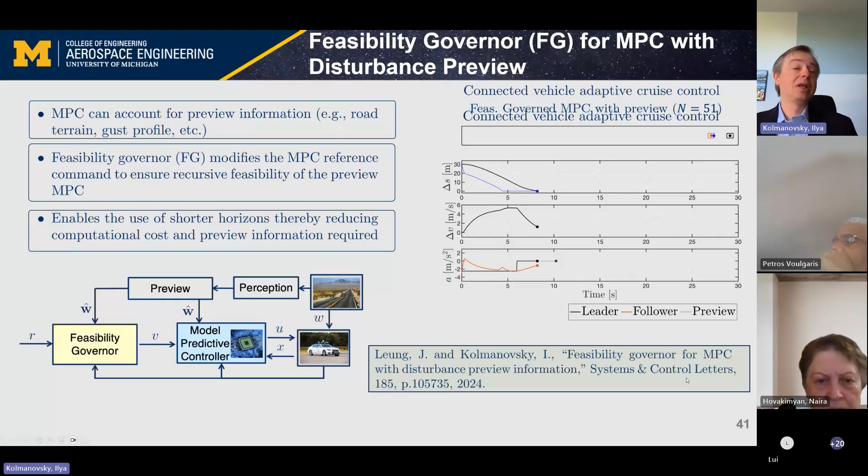I'm not going to have time to talk about multidisciplinary design optimization. I'll skip that part and go directly to my conclusion - some closing thoughts for my talk.

Inexactness of computations in MPC is obviously a practical issue, because typically you encounter the fact that your processor is not able to perform computations exactly in practical applications, and clearly that inexactness affects closed loop dynamics and closed loop properties. What's interesting is that you can analyze that and develop some analysis results and guarantees - for example, you could develop bounds on the number of iterations to ensure closed loop stability for receding horizon MPC.

I haven't talked about this, but we also looked at shrinking horizon MPC, where the horizon doesn't advance into the future but shrinks by one step with every step. For example, when I'm trying to give a talk, my terminal time of ending the talk is usually fixed, so I have to adjust to this end deadline - this is what we call shrinking horizon MPC. It turns out you can also do analysis of inexactness in that setting as well.

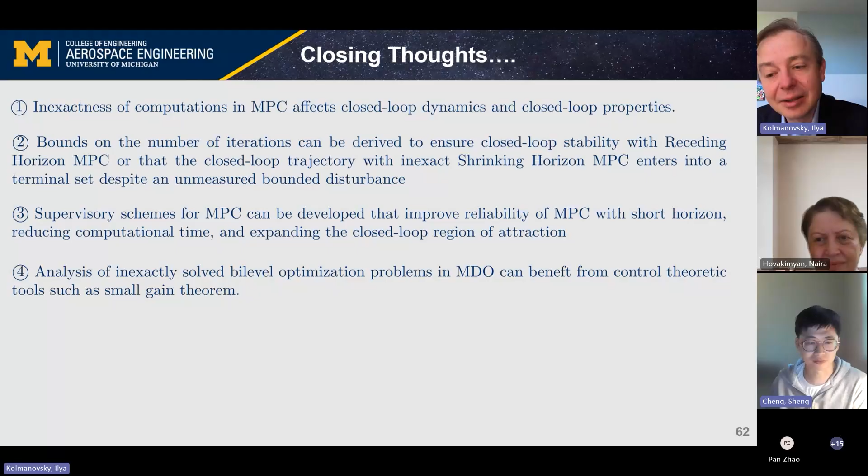Thank you for your answer and sharing your thoughts. I will follow up with you by email, please, so that I can read the papers you referred to. Yeah. Thank you. Yes, please.